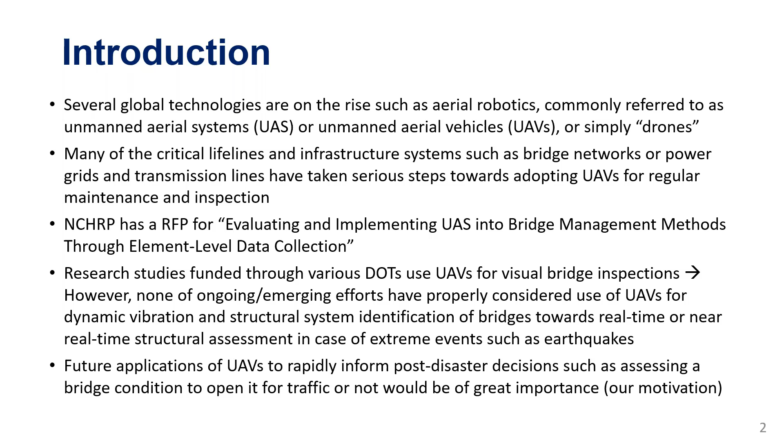So if we were to leverage this further, that's the vision that I'm hoping to accomplish through my career, if I can, to tie to the hazards, and specifically the seismic hazards, if we can have an autonomous or semi-autonomous real-time or near real-time, it depends on the limitations that we have, decision-making framework. So when you have an earthquake in California, they do have now these early warning systems: if an earthquake is sensed 30, 40 kilometers below the surface of the earth, once the waves are generated, you can actually trigger some early warnings that can reach the surface and reach even the critical infrastructure maybe 10 to 20 seconds before the earthquake hits, which is not a lot of time, but can be enough time to, let's say, launch a drone.

If you have a drone or more than one parked on important structures, the Bay Bridge, for example, or the Golden Gate Bridge in the Bay Area, and their control stations would receive these signals, maybe the drone will launch to a predefined place, and by the time the drone is ready to shoot the video, the earthquake starts and the structure starts vibrating. You can collect the video of the vibrating bridge or structure, feed it to the cloud, and use a digital twin or any type of these technologies to see these displacements that the drone captured. The drone will capture a video, the video will be processed to understand how much displacement the bridge saw during the earthquake, and using a digital twin you can interpret this displacement. Is it a red flag or not? Then you can make a decision on this bridge.

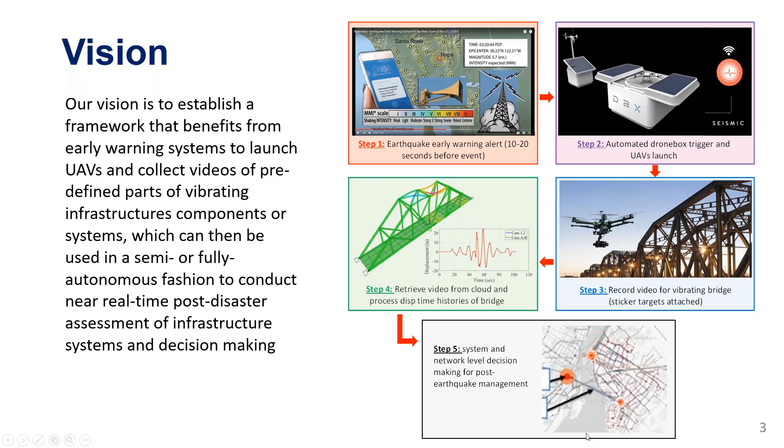And if you do the same thing for several structures or several important bridges on a network, you can have a good idea of the system, and plan your emergency response accordingly. Maybe go to this route, don't go to this route, this bridge needs immediate attention, this one doesn't need as immediate attention, and so on. So as I said, it's a very long-term vision, and it involves a lot of components. So this project will just provide some preliminary or foundational work for realizing this vision.

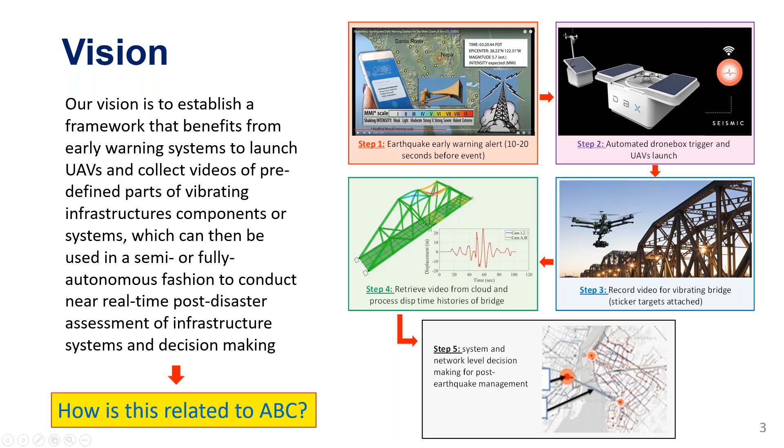So how is this related to ABC? I answered this question before. It's not necessarily ABC in terms of the technology itself, but it has to do with the fast response and the immediate decision making, and immediate traffic flow decisions associated with bridges in case of extreme events like seismic. So this is what we have in terms of the relevance to ABC.

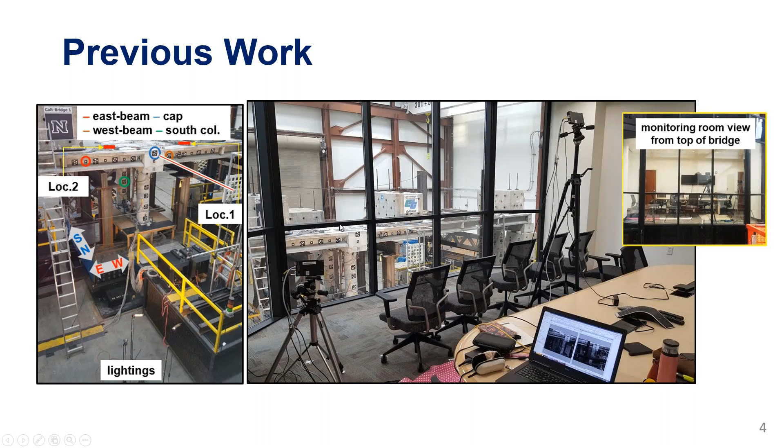We built this project based on our work on conventional vision-based monitoring. So we have done a lot of work for dynamic and seismic response monitoring using stationary cameras. And this is some of the bridges we tested. We tested 2 or 3 bridges. I think when I started at UNR, there were several tests here that we monitored. We even developed some reputation in this area, and we were invited to Japan, and we were able to monitor a full-scale test in Japan. So we have developed our own in-house tools for post-processing videos using stationary cameras to inform structural and seismic response.

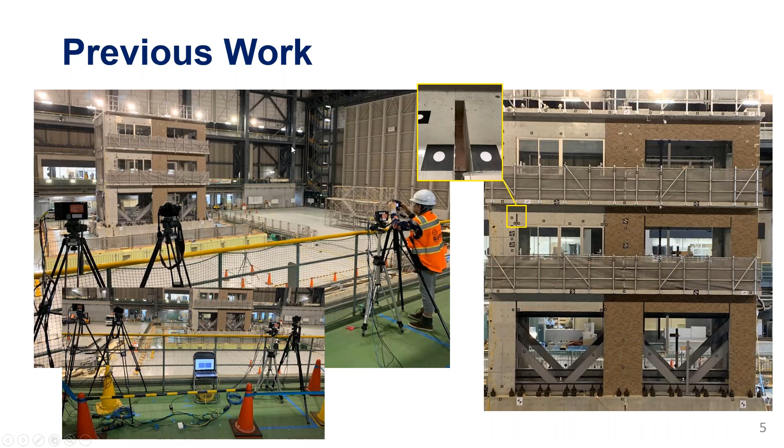But as we do our work, we always face some challenges, and that's why we need to do research along the way. So in this specific project, for example, you see a nice illuminated picture here, but when you adjust the camera settings for the right digital image correlation and video monitoring settings, this is what the camera saw. So it's a dark image,

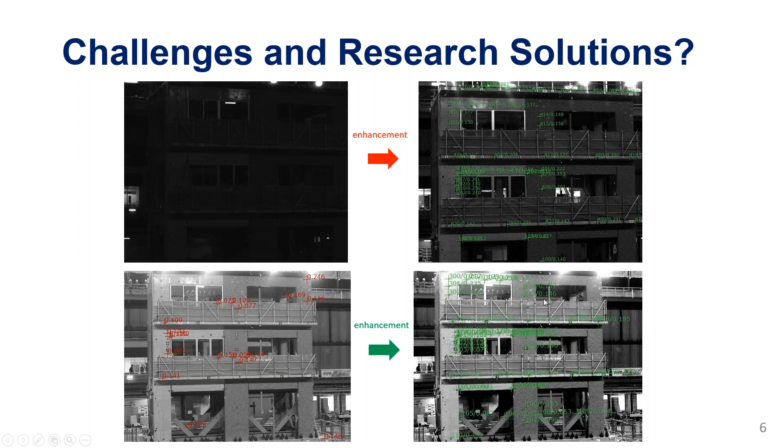and all the registration of the targets that we are trying to track here failed. So we needed to do some side research to provide image enhancement frameworks, and we were successful in doing this. And eventually we were able to get the result that we were hoping for from this building. So this is to give you an idea how challenges arise during research and what we do to overcome these challenges. And that's exactly what we are going to do for the drones.

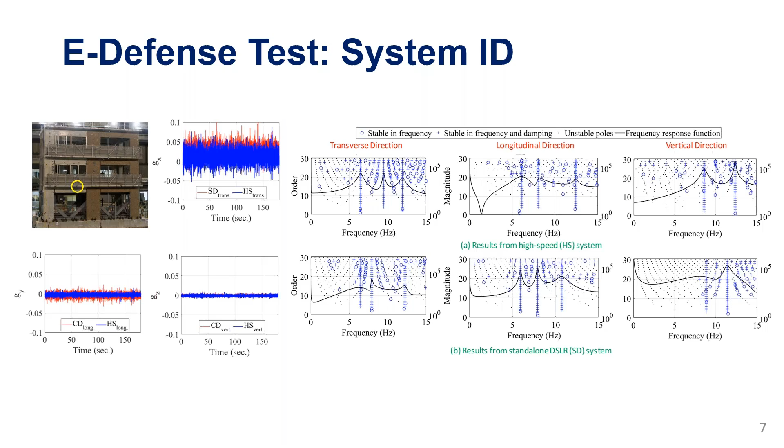So the objective of this project is to do some V&V, validation and verification tests, using drone videos. We are not into the drone technology yet. We just want to shoot a video with the drone and see what we can get from this video. It's as simple as this.

So the tasks in general: what are the existing methods and technologies towards autonomous drone-based dynamic response monitoring. The drone launch, these types of things, we are not going to do research in this area, but at least we wanted to collect the state of the art in this area, and then do some small scale tests that we can use for verification, and large scale tests, which I will show you now, and eventually try to come up with some guidance on whether drones are simply easy to implement for dynamic response monitoring or not.

We use drones already for visual inspection. Drones fly around bridges. They can zoom in and out on connections and see loose bolts and cracks and all these types of things. But what we are looking at here is a larger response, which is the dynamic response of a full vibrating structure. So that's what we wanted to assess in this project.

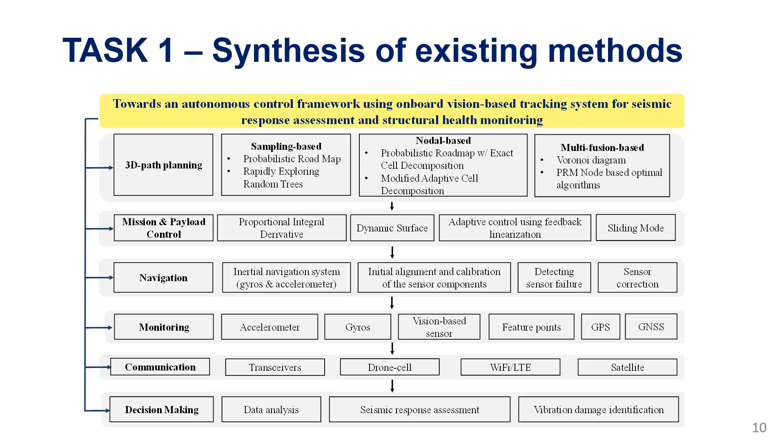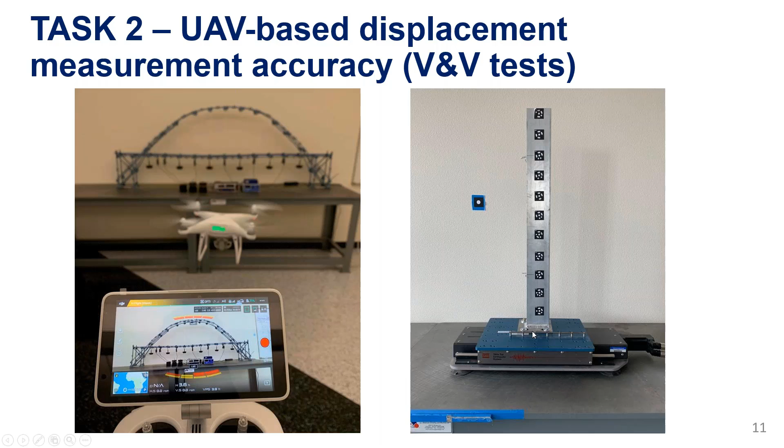The second task is to do small scale tests. So these are some of the toys, if you will, that we have in our lab. That's a small lab, not our big lab. And we wanted to fly a drone and vibrate this small structure that you see here, and see if we apply a sine wave with a known displacement and a known frequency, can we reproduce these results if we shoot a video using a drone. So that's an example of one of the tests that we did here. So that's the drone flying.

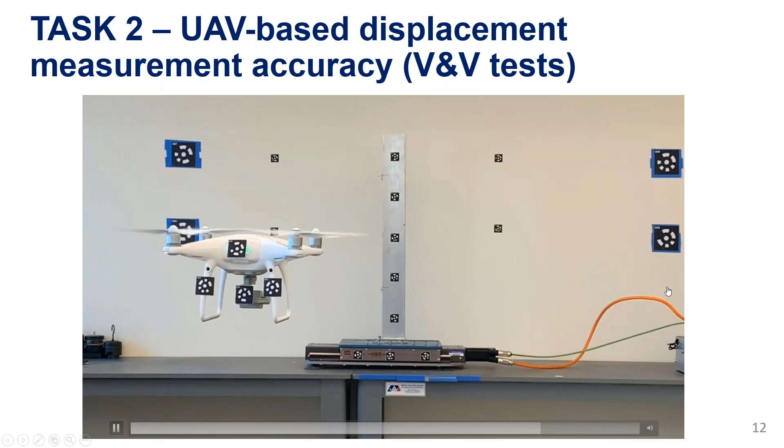And as you can see here, the drone starts drifting, and this is exactly the type of challenge that we will be trying to resolve when we do the post-processing. So that's one example. We collected the videos, we conducted the test, but the post-processing will be ongoing for the next few months. Again, this is not simple; just a short video like this might need a few weeks or several months just to get something meaningful out of it.

The good news is that we had a very large scale test, a very interesting and unique test that happened in our lab a couple months ago, and I was able to get permission to monitor this with a drone. So I'm sharing with you a short video, just a few seconds from the test, and just take a look at the drone. See the drone here, how it shifts. Unfortunately, I was shooting this video from my phone, so the video itself is not stable or stationary. You can even see my reflection here, but you will be able to tell that the drone is drifting, and I will show you in the next slide what this drifting looks like.

So you see here, that's the shake table test. It's a bi-directional test, and it's two tables actually. Let me play it again, and that's the drone, shooting a video in the plan view for the test. So that's the video again, and you can see here the drone is swaying, and sometimes actually you see plus or minus 6 inches jumps.

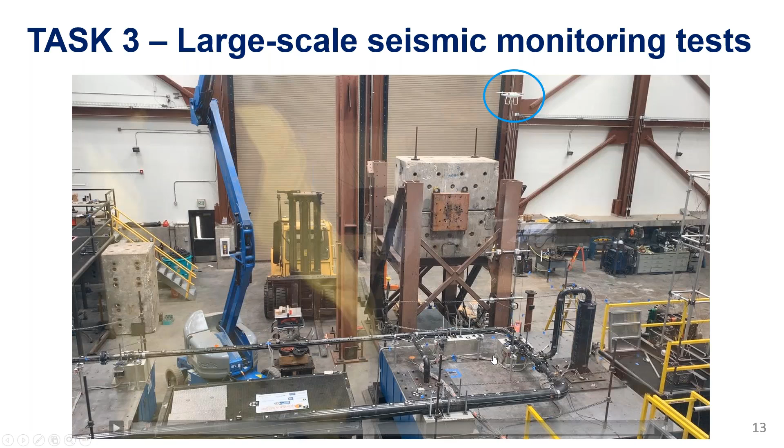So what did the drone see for this test? That's what I have in the next slide. This is what the drone saw in a test like this, and that's what we recorded from the drone. And so again, when I play the video, I have this yellow target for you. That's a stationary point. So this black box is a stationary box sitting on the lab floor.

So just keep your eyes, and I will play the video a couple times if you want also, just keep your eyes on this yellow circle. That's a stationary point. If it's not stationary, this means that the drone is swaying, and you will see what type of swaying the drone is doing here when I play the video.

So you can see the table is moving bidirectionally. That's an El Centro earthquake in two directions. And you can see here that the drone is shifting, and you will see even a big twist now. You see, that's the twist that I was talking about. Again, this is all something that we cannot control. You launch the drone and you start shooting the video, and it's the aerodynamics around the drone and the drone stability itself that will do this.

So speaking of challenges, similar to what I showed you for the Japanese test, when we ended up with a side research to enhance these pictures, that's what we are working on now. We know that drones drift because of the wind, and at the end of the test, that's the end of the video, you see we even completely missed this target. So we have plus or minus 5 to 10 inches in the plan view, maybe not 10 inches, maybe plus or minus 5 inches.

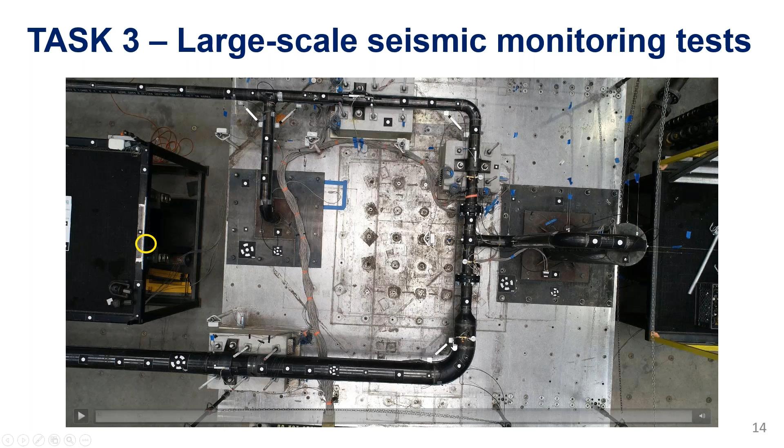Again, it's research, so we cannot know yet if we will be successful or not, but I'm sure that this is a very interesting and promising area, and we would like to pursue as much research as we can in this area.

So the timeline for the remaining work: the synthesis of the drone technologies, that's the master's thesis Muni is working on now, and hopefully she'll wrap up a nice draft by the end of the spring. The post-processing is ongoing, but again, I don't want to overpromise. I think we'll need a few months to get something meaningful from the small-scale test that we did, similar to the one that I showed you, and even more time for the large-scale ones. So we are hoping that by the end of the summer, we will wrap up this project.

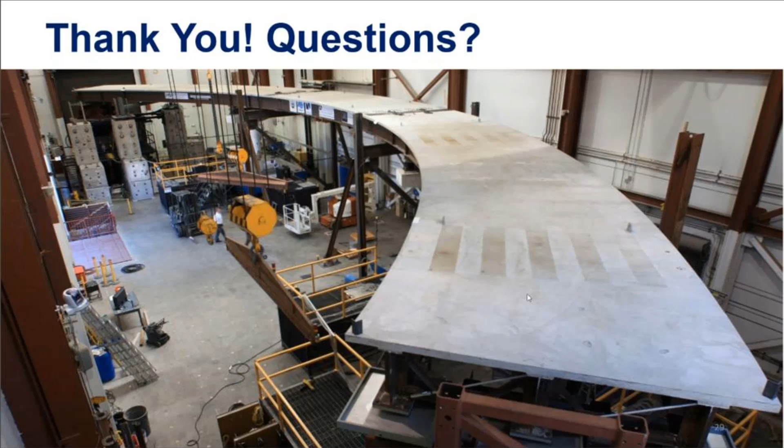Thank you very much, Dr. Mustafa.